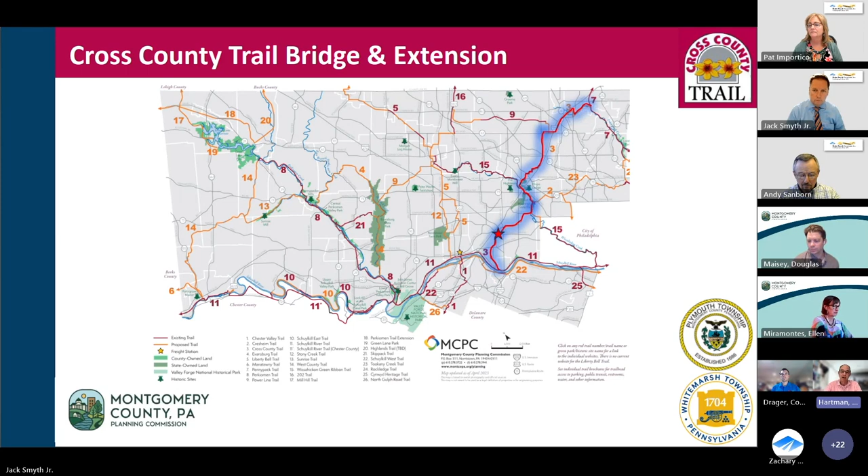Zooming into the subject of the trail tonight, this is the section we call the Cross-County Trail Bridge and Extension. It's about 1.8 miles in length. It runs starting on the left-hand side of the screen, where that star is, from where the Cross-County Trail currently terminates at Germantown Pike, and then runs east and north. Jack is going to get into the details of what that alignment looks like—I'm just giving you the broad overview here.

It runs north and east to where it will ultimately connect to and cross over Joshua Road. That's the point at which it will tie into the trail running through Erdenheim Farm and the area that the White Marsh Foundation also owns, to the east of where that right-hand star is located. So this is a really important section.

That section I just described in the Erdenheim Farm area is projected to go into construction sometime early next year, and we hope to bid that later this year. As most of you probably know, this section we're talking about this evening runs through Plymouth and Whitemarsh Townships—mostly Whitemarsh Township, but the section with the bridge over Germantown Pike up to where you get to Butler Pike is located in Plymouth.

As far as the project teams go, as Mike described, this is a project of Montgomery County, specifically the Montgomery County Planning Commission. I'm the manager of all trail development projects in Montgomery County on behalf of the county, and I'm also joined by Ellen Miramontes and Doug Maisey in the management of this particular project.

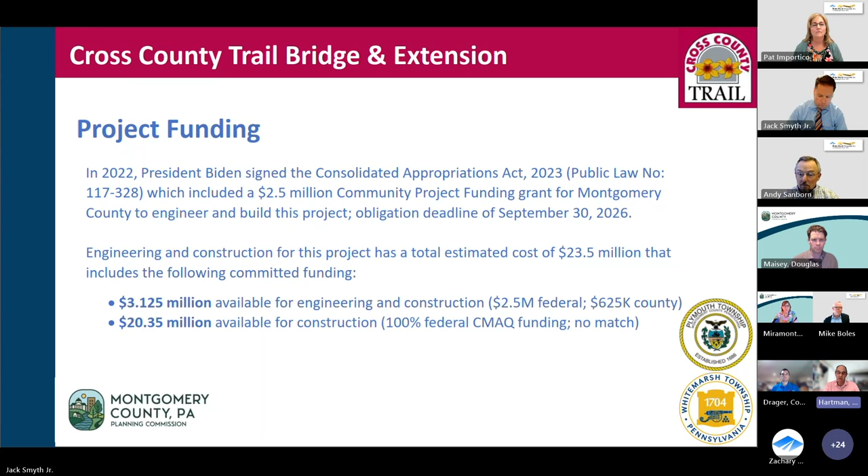Prior to arriving where we are today, a lot of work has gone into this project. There were three prior feasibility studies performed in 2015. Some trail alignments for this area were investigated in 2022. We did a feasibility study by Gilmore and Associates that focused solely on the bridge and what that would involve. Then in 2024, we published another feasibility study that identified the preferred alignment for this trail, which is what Boles Smyth is using to begin the engineering process and was used as the inspiration for where the trail should ultimately be aligned.

There's been a lot of public outreach for this project and a lot of coordination already with the municipalities involved, as well as PennDOT.

We've had a number of meetings with both Plymouth and Whitemarsh Townships, coordination meetings with PennDOT, and meetings with various stakeholders—the businesses and some of the residents situated along the designated alignment for the trail. We also had an elected officials virtual meeting last week. Public outreach is super important to the county, and it's especially important for this project, which is why your input matters so much and why we're thankful to have you here tonight. We look forward to your questions.

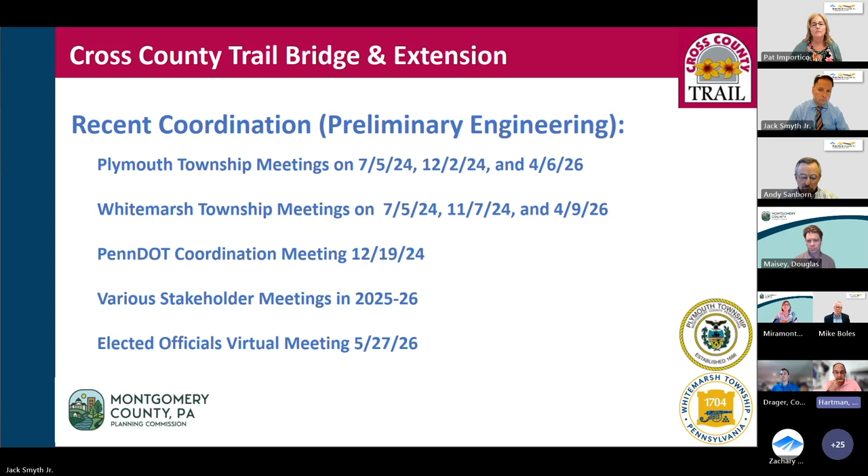I think this is where I'll throw it over to Jack, and he'll get into the details of the project itself. Thanks, Bill, and good evening everyone. As Bill mentioned, my name's Jack Smyth from Boles Smyth Associates. We have various team members on the call to get questions and answer any questions you may have. We also have Colin Drager from SAI, the structural engineer for this project. So if it's a general structure question, I'm in good shape, but if it gets more detailed, I'll turn it over to Colin and he can answer those more nitty-gritty structure questions.

Just reorienting and going back to the overall slide here. As Bill mentioned, starting in Plymouth to the west at Chemical and Germantown Pike, the trail will run over Germantown Pike and Plymouth Creek, out to Butler Pike, through some wooded areas out to Flowertown Road, follow along Flowertown Road, and at one point at Colonial Drive actually cross over from one side of the road to the other—we'll get into that—out to Joshua Road. Then we'll head north up Joshua Road to tie into the adjacent section of trail at Erdenheim Farms.

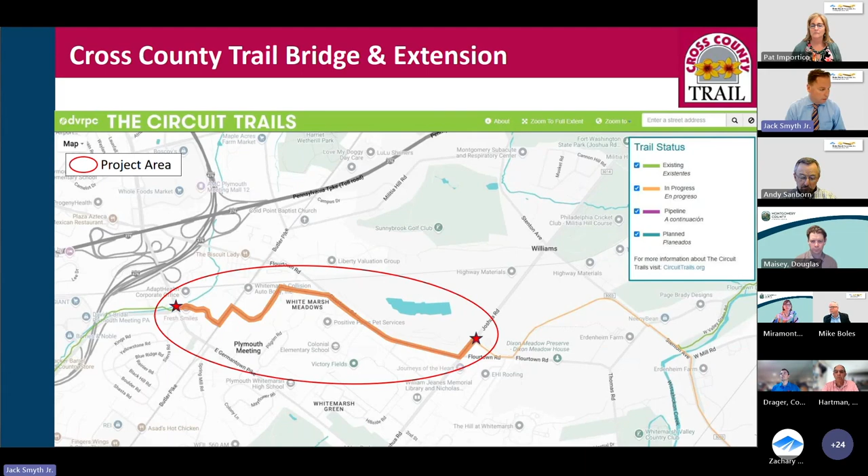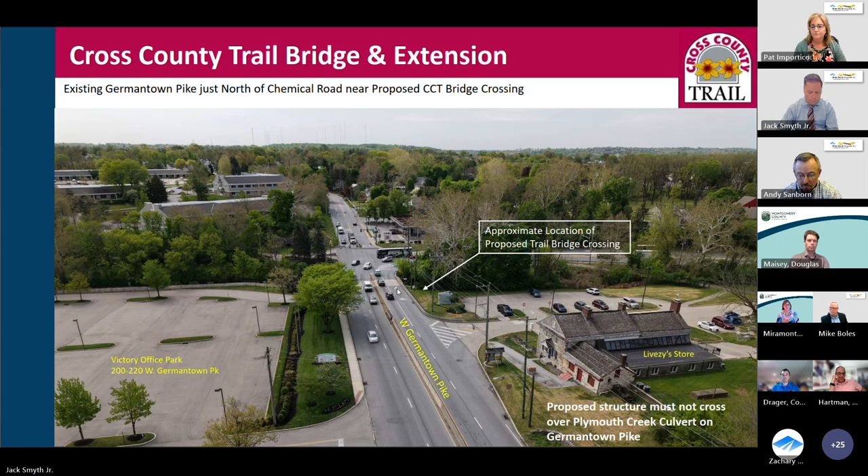So the look of the bridge, the type of the bridge, is what we are focusing on right now, most specifically the type of the bridge. That's where Colin comes in, and what we wanted to show you here this evening.

This is the Chester Valley Trail, installed around 2019 over Henderson Road in Upper Merion, right by the turnpike. During a weekend detour, this truss bridge was brought in two pieces, put together on the road, and then pick-and-placed by a crane onto the abutments that had been previously installed.

For our bridge, we'll have piers on either side, and the bridge will continue as we come off of Germantown Pike. But this gives an example of one option - this is a truss type of bridge.

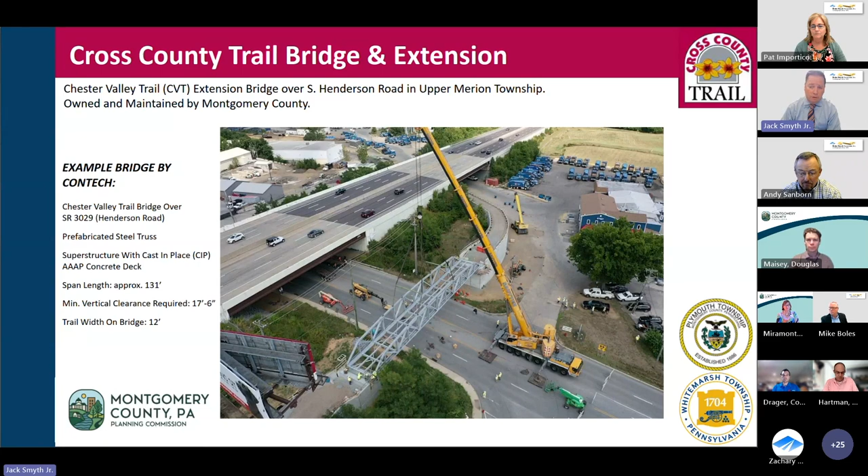You can also do other types with steel beams, like a curved steel beam as you're crossing Germantown Pike and the creek itself. So again, there are different options, and we wanted to show you that at this point, what we're very focused on is what type of structure will be selected.

This is another view from the road, showing that there are different aesthetic treatments that can be done to the bridge, and that will be part of moving forward after you get the type, the size, and the location of the bridge set.

Then you can get into different foundation types and designs. As you're doing that, you can also look at different aesthetics for things like the protective fence, railings on the structure, form liners for the piers and/or abutments - different things of that nature to set the look of the bridge. At this point we aren't there yet, so I wanted to make sure we're clear that the look of the bridge has not been determined yet.

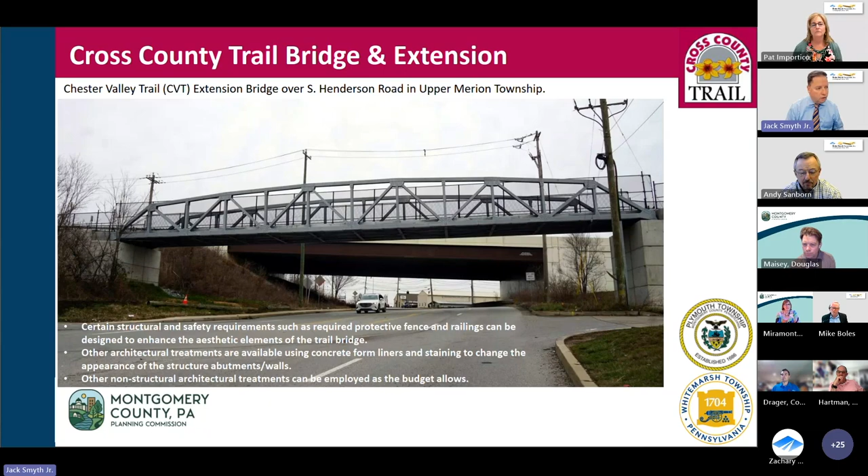So we're coming out of the Hall property and we're getting into the White Marsh area where the residential neighborhoods of Woodbine Way and Wildflower Drive are located.

One of the important things to note in this area is that when we walked it, as a team, we walked every step of this to just gain an understanding of, is this the right place for the trail? And if not, should we move or realign the trail in certain areas? This was an area that did get realigned onto the sanitary easement because it naturally lent itself to the trail, whereas other ways to get through this wooded area were more challenging.

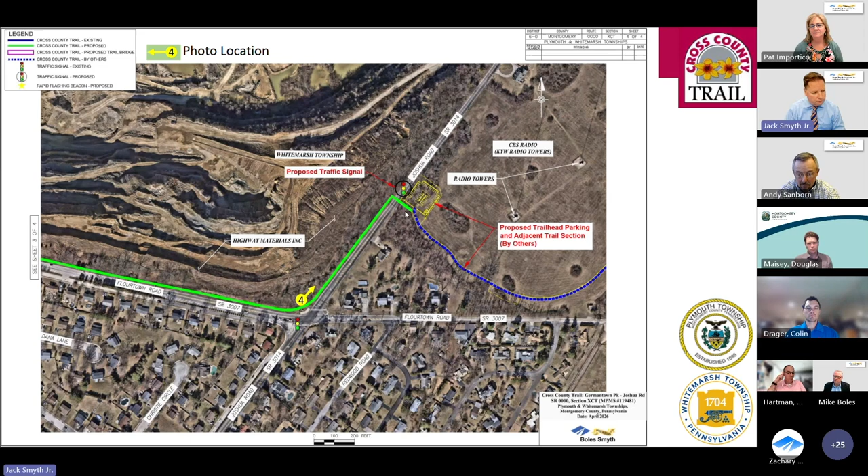From there, we go up Joshua Road to a point where, shown in blue, is the adjacent section that will be under construction that Bill mentioned, the Erdenheim Farm section. This does have a proposed trailhead parking lot that is part of that project. So that's where we would cross, and through coordination with PennDOT during the feasibility study, this would be a proposed traffic signal located here to cross safely into the Erdenheim Farm section.

This is a picture from that northwest corner ADA ramp. Our trail would be behind it here and we would connect to it. And then the trail would run along the tree line area where it would then get to the crest of the hill and cross over to the Erdenheim Farm section.

So as part of our preliminary engineering, we are required to get environmental clearance through the NEPA process. As such, we're reviewing and analyzing the impacts to natural resources, community resources, and cultural resources. Right now, we are in the process of our Section 106 consultation, and that is the above ground historic resources and/or below ground resources. One of the components of that is what's called the consulting parties coordination.

So as we get concurrence from PennDOT in regards to who will be a part of the consulting parties, we'll be reaching out to different organizations and stakeholders like the HARB to really get some good coordination through our environmental process.

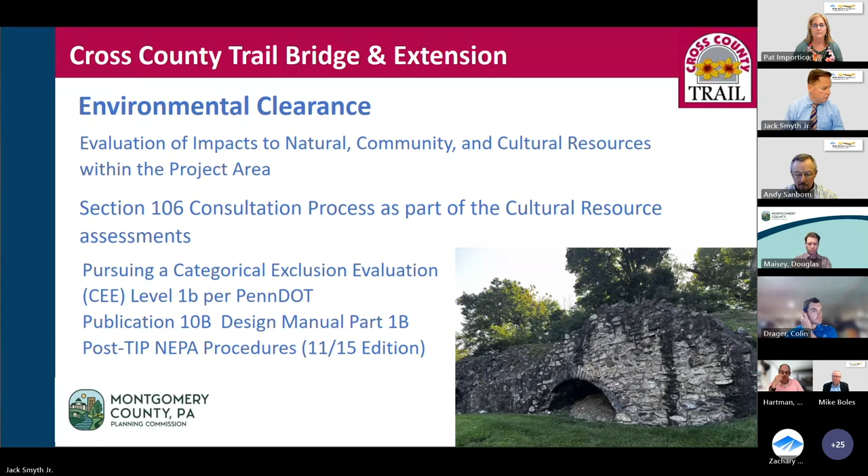Project schedule: we're in preliminary engineering right now, and we expect to be through the end of this year. Then we would get into final design, but the things that we need to get out of preliminary engineering are the environmental clearance from our categorical exclusion.

On the design end, we need to have a safety review and design field view. The safety review looks at all the different safety components of this project and analyzes it from a before and an after condition. It also looks at all the design criteria and makes sure that you're meeting the standards. If you don't meet the standards, you have to justify that to PennDOT.

We anticipate that we're meeting all of the standards that we need for the trail and the structure, and to continue our public and stakeholder involvement that will be ongoing through preliminary engineering and absolutely into and through final design.

The schedule is such that we believe final design will be approximately 2 years. One of the things that really dictates how long final design goes is the acquisition of right-of-way. As I mentioned, it's following the PennDOT process, and it's very linear and very scripted. So that really is usually one of the things that defines the project schedule.

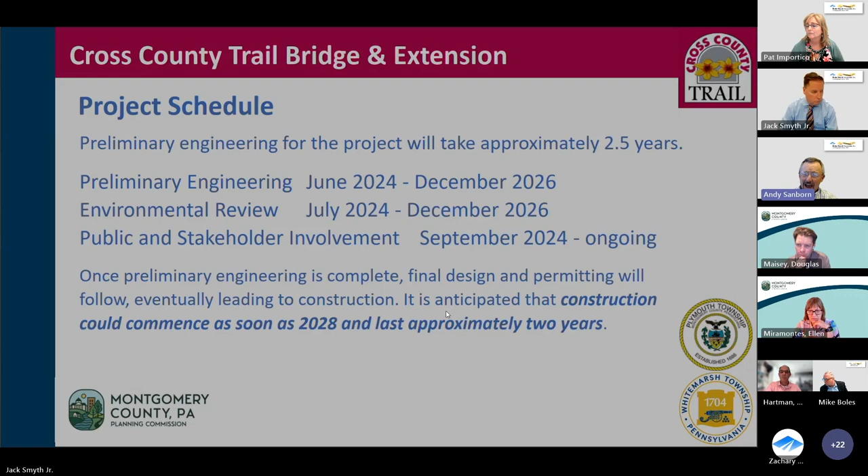The rear of the Halb property is pockmarked with sinkholes, often water-filled. And there is a swale that carries stormwater runoff from Halb to the adjacent Seventh-day Adventist Church property, where the water is collected underground.

Thank you. I think I just passed it.

So right now, this is showing approximately 10 parking spaces. Whether it gets extended and maybe it gets more, 10 to 15, but it's in the 10 to 15 space range. There hasn't been a final determination on the exact number, but that's around what it generally would be in that range.

Coming through the Hall property and into the wooded area, we are looking at the sinkholes, but we also have some wetlands back there as a result of the stormwater that's coming down from the neighborhoods and through the woods.

So we are avoiding wetlands through this area to get up to that sanitary easement. And yes, we did see the sinkholes that you're talking about in that area. We actually surveyed ones that were opened up so that we know where they are, and we'll continue to monitor that through preliminary and engineering and final design.

From a stormwater perspective, a big component of our permitting process is going to be how are you dealing with the water that is coming down and coming into your site, so to speak. We need to collect that and manage it. So through this area, we will be looking at swales and how to carry stormwater.

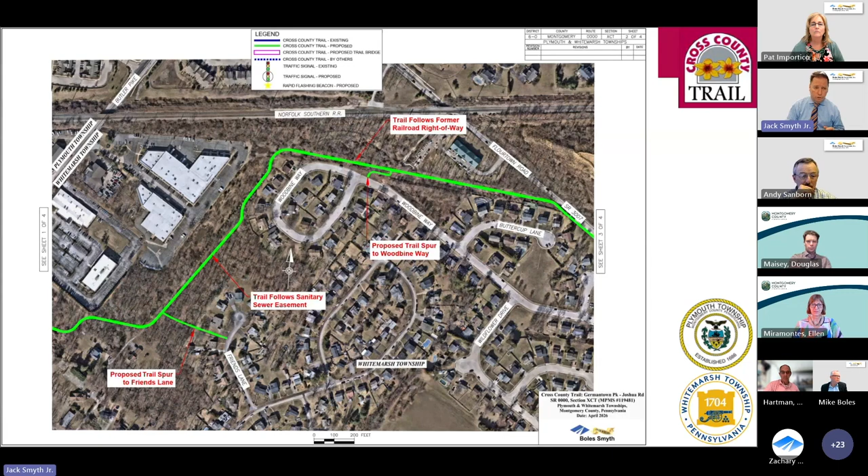Or different best management practice type of stormwater features that we don't want to promote infiltration because of the sinkholes, but we do want to do different things, and there are different things that you can do to manage the stormwater accordingly.

Are you ready for another question, Jack? Yes, please.

Will the traffic signals be designed or redesigned to allow them to be triggered by cyclists without having to get off the trail? For example, signals along Chemical Road.

That's a good question. I don't foresee that there would be bike signals, and I just want to clarify what that is. So at certain signals, you actually have a traffic signal head that shows a green, yellow, and red with a bike signal on it.

I wouldn't see that that would happen here, but we would want to have detection and actuation of the signal equipment such that traditionally you do push buttons. Does it make sense instead to do a video detection? They especially do that at rapid flashing beacon locations for mid-block crossings. They'll have video detection on the ADA ramps at the landings, so you're automatically detected.